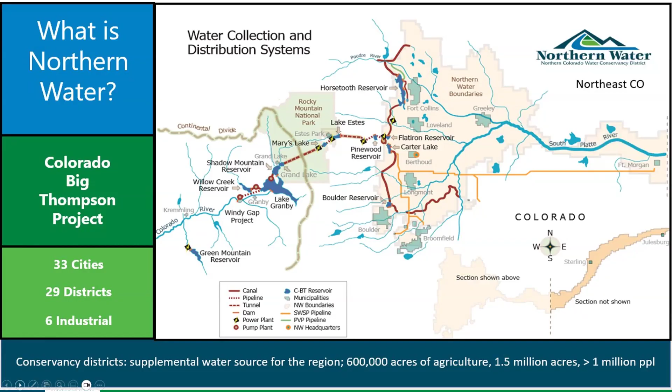So we do have an efficiency program here at Northern Water. That's where Lindsay and myself spend most of our time. Lindsay Nerad here is on the call as well. She'll be hopping into the SLT conversation here in a bit.

At the top left, you can see we do have a conservation garden on campus in Berthoud. If you ever want to come visit, you can come visit it during normal business hours and on the weekends. We're usually there during the week as well. If you ever want a free tour, we're happy to walk you around, show you all the cool plants.

It's just a lot of low water alternatives to bluegrass and other really thirsty plant material. So we like to show off a lot of native stuff, warm season grasses, native grasses, good trees, perennials, and plants and such. So if you ever want to come check it out, let us know. We'd love to show you around.

We also host a series of consultation and audit programs. We have 2 outdoor audit programs, one of which is with Resource Central. They support our commercial outdoor audit for a lot of our HOAs and businesses that request these services, whenever we just need a really comprehensive overview of what the irrigation scheduling might look like and what their general water use is.

This is where we like to partner with Resource Central and get those services out there. We do have an advanced audit program when we get into some bigger systems where maybe it's a lot of acreage or we have pumps and ponds, reclaimed water source. It gets a little bit messy, so we like to bring in an engineer and they'll do an advanced audit.

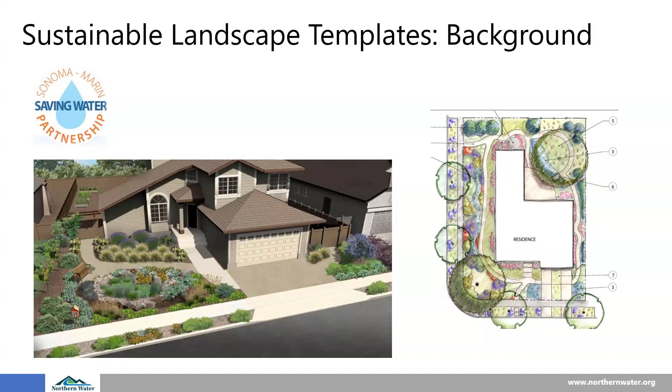And so we had a stakeholder group that we also like to call an advisory group, because they really are sort of the brains behind this endeavor and really helped guide the process.

City and County of Boulder, we had the Boulder Fire Rescue, Wildfire Partners, and a Commercial Horticultural Specialist that was actually also with the CSU Extension. And then a nonprofit, the Boulder Watershed Collective, also took part in the stakeholder process.

So to give you a rough timeline on how that happened: in January, we held our first initial meeting, this was January of 2022, with our advisory group. There were initially a few more folks involved than the list I just mentioned, but it was a long process, and not everybody was able to stay with us through that whole process.

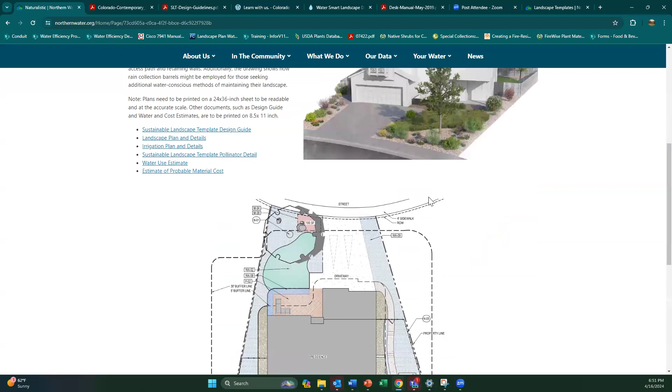And then the Naturalistic - we can just open that one real quick. You can see here what the features are: it's a pie-shaped lot with a walkout basement and 14,000 square feet. This gives you that 3D of what, if everything goes right, it will look like in your landscape.

And this is kind of an overview of the landscape plan, so we have our lawn and water needs laid out here. We'll go back - we also have a large lot, which was something requested by the stakeholder group, for the needs of the unincorporated Boulder County area.

We can take a quick look at that - you can see this is over 45,000 square feet, so a much larger lot. And this is the last one I'll show.

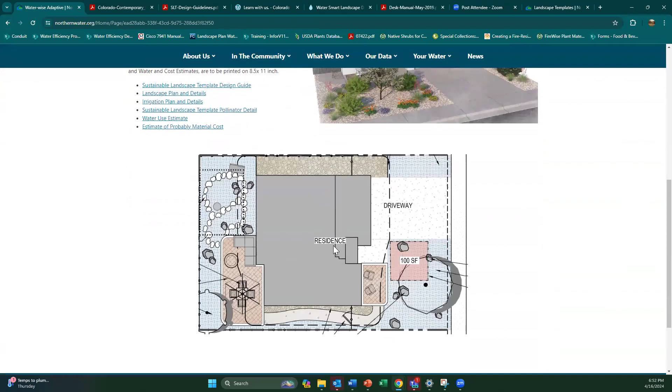This is the Waterwise Adaptive, modeled after the Sagamore neighborhood. Much smaller than the other ones, just 3,000 square feet. We don't even - in this option, and there's actually another option that doesn't include any turf in the plan.

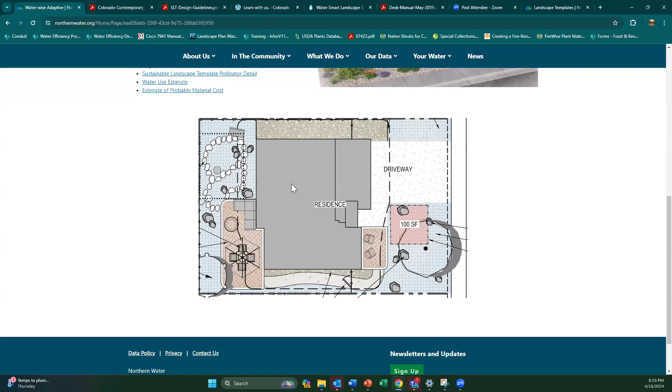But of course, all of these are just suggestions - for you to change and adapt and make your own. You could make the patio smaller and put lawn in there, or however you wanted to change that.

So go back here and I'll go through this Colorado Contemporary. They all come with the same tools, the same list of resources, so we won't miss out on anything by just using this plan. I'll start with the design guide.

So obviously we have a table of contents there, a little bit about the project background. I want to point out that this talks about flex space - each design has what we call flex space.

These are spaces that are, as they sound, flexible. You could use these for a kids' play area, a fenced dog run, an alternative outdoor storage location, a vegetable garden, or a pollinator garden. We do have a pollinator detail included in the resources, which we'll talk about later.

In this section, every plan specifies a type of grass, but again, just a suggestion. Maybe the plan that works best for your site identifies buffalo blue grama mix as the lawn type, but if you have kids and a dog, that's probably not going to work, so you might want to pick something else.

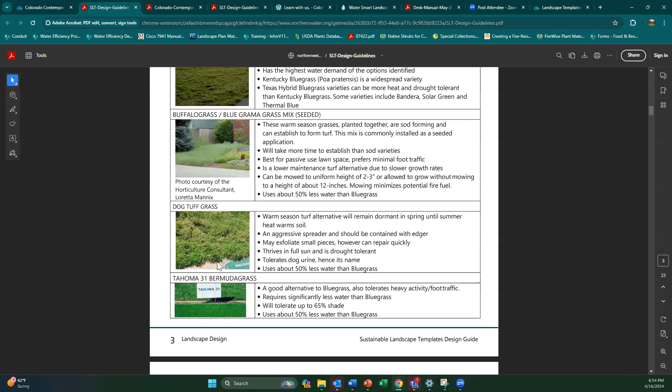You might want to pick the dog tuff grass. This will give you the key characteristics of each sod type or seed mix, whichever the turf requires. So these are kind of pros and cons of each type of turf here.

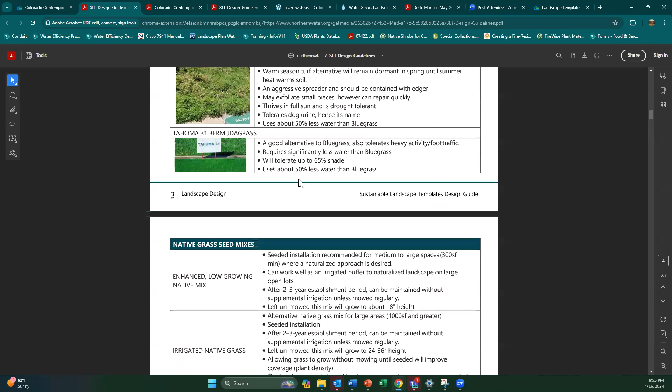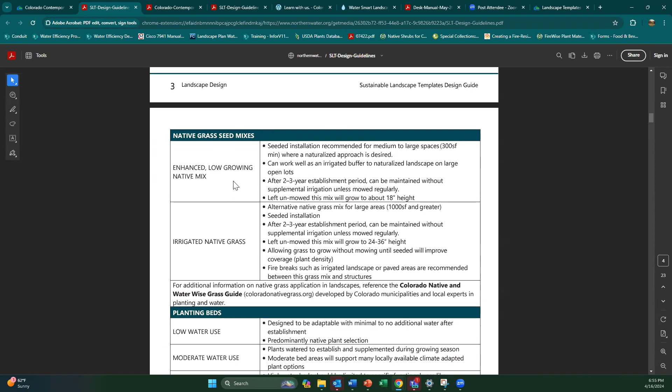And then this one's just primarily for the large lot, the native grass seed mixes. That's more designed for the large area. We'll look at that a little bit more later.

And then planting beds, primarily we're going to use those low water use planting beds. This is just some points on how you're going to establish those plants, the water use that you'll need. We don't really have any high water use areas. Those are really just going to be your vegetable gardens or your annual beds, so we don't have anything specified for that. We definitely are trying to move away from high water use areas, as you can imagine.

As you can see, this is irrigation, so I will leave that up to Spencer. He's our irrigation guy, he'll be talking to you about that.

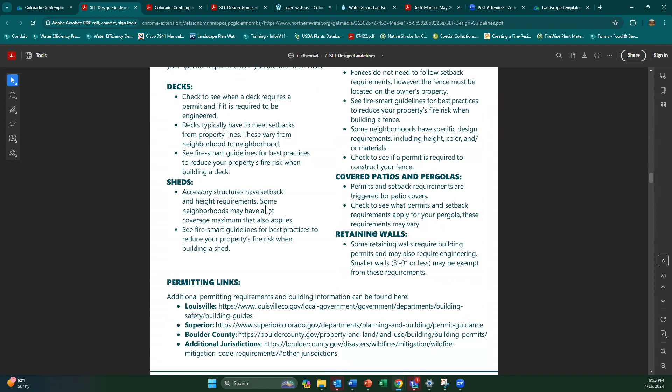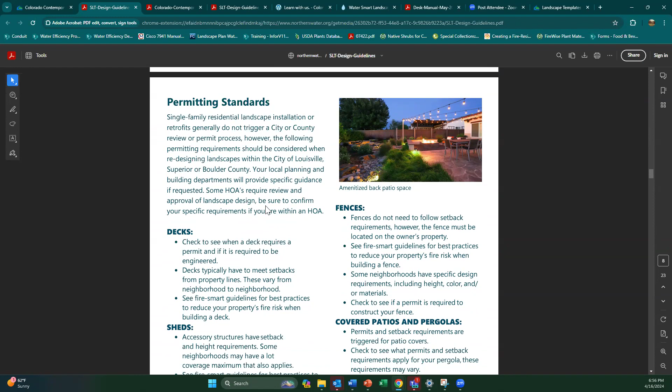And so permitting, we found is just kind of a moving target, and so we didn't really want to lay out too much in terms of permitting. We wanted to just give you some basic tips and provide the websites you need to look up those permitting standards. So if you're looking at any of these things, decks, fences, pergolas, retaining walls, definitely check in with your local municipality to see what sort of permits you might need.

This was obviously a big one for the templates, the Fire Smart standards. First, very important, we have our zones. Zone 1, you don't want to have anything in that first 5 feet from your house. We're really just looking at rock, fences that are metal. Really staying away from any plant material in that zone.

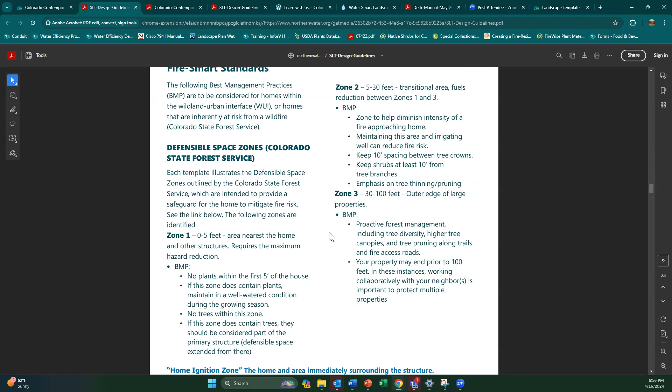And then in the second zone, we're really paying attention to where our trees are. Our trees, the mature canopy, need to be 10 feet apart, in addition to 10 feet away from the roof. And we don't want any shrubs under trees, we don't want anything woody. We're really just looking at ground covers.

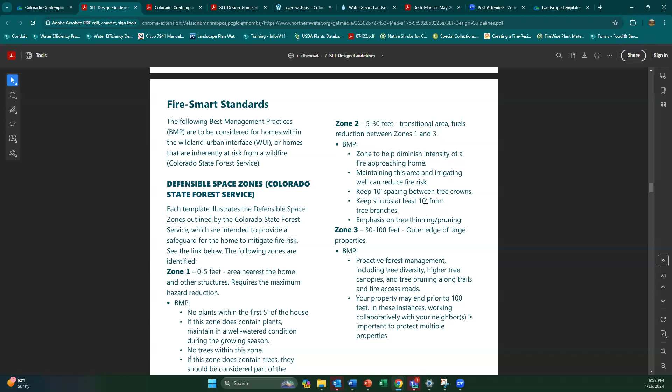And then just some other things to note. You probably won't want to use any rock mulches—sorry, you won't want to use any wood mulches. You're definitely going to want to use rock mulch, pea gravel, and those sorts of things that aren't flammable. So if you're really attached to your wood mulch, just make sure you're surrounding it with some type of hardscape, so it's like an island of mulch surrounded by other non-flammable things. But we use a lot of the squeegee at the garden, and we've been finding a lot of benefits from that, so we usually recommend squeegee as a mulch.

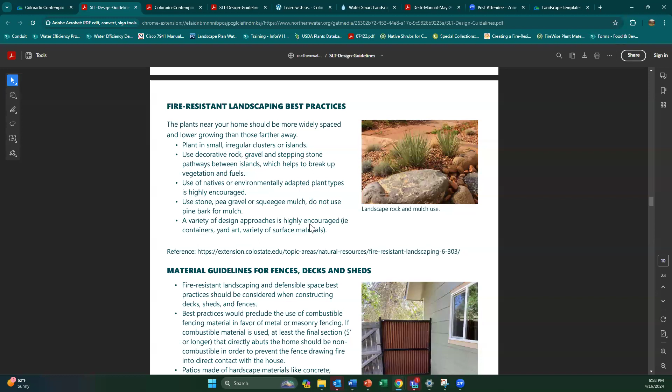And that's what all of the plans require or suggest, I guess. So this you'll see here is the fence, attached to the house, the 5 feet of non-flammable. So it's not wood here, that's metal, corrugated metal. And I know that's not the prettiest, there's definitely some different things you can do. That's just to give you an idea of what that would look like.

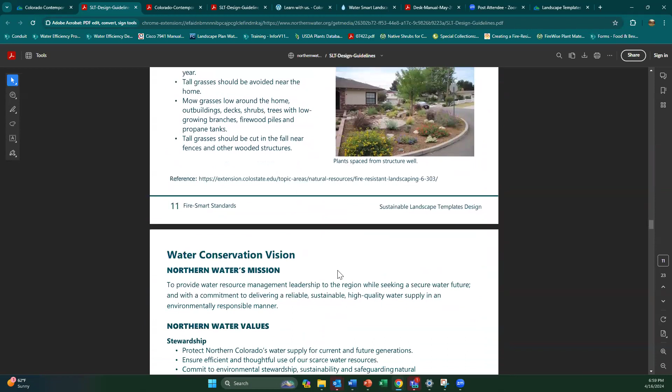I don't want to get too much into every detail here because you can definitely look over this on your own time. I mostly just want to outline the things that I think are important.

Moving down here, another thing to note, we by and large definitely recommend that folks go ahead and get their soil tested, particularly if you're in a burn area. You might have contamination in the soil, and it might really be necessary to amend that soil or bring in off-site soil. However, typically we don't recommend tilling or adding a lot of organic compost unless it's for your vegetable gardens or annual beds or things like that. Our native and low water plants don't really need those types of amendments, they do perfectly fine in our native soils.

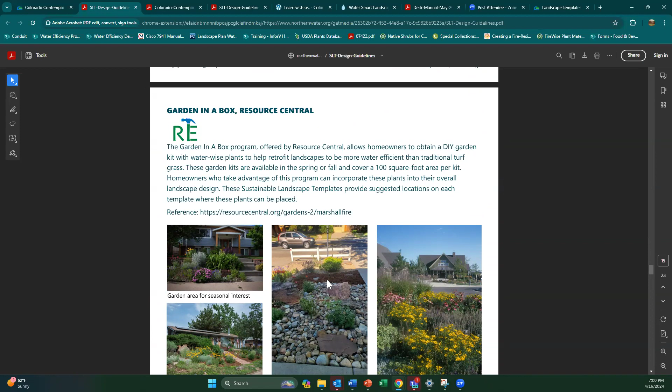So we'll move down here. You guys know all about Garden in a Box, I'm assuming, since you're here. But the folks that were affected by the Marshall Fire were eligible for, I believe, 2 of the Garden in a Box for their yard.

Okay, just a note, it's important that if you are wanting to print out any of these plans, that you print this section out on 24 by 36 sheets. That will ensure that you're able to read them and that they are to scale. Each one here, as you can see as it slowly loads, has a scale, so it's important if you want it to scale that you print it on a 24 by 36 sheet.

So we'll start up here, general landscape notes. These by and large are notes that you will want your contractor to follow. It's probably a good idea for you to read them as well, just so that you're making sure your contractor is doing the right thing.

I do want to point out that the first one here says you have the option to downsize plant material. I would actually recommend this. I think by and large the plans call for 1 gallon pots, but I think 4-inch pots are perfectly fine. What we find is that with smaller plant sizes, they tend to establish more quickly.

So when a plant is in a gallon pot, it's lived so much of its life in that container, and it's going to take a little bit longer for those roots to establish in the ground when you plant them. Of course, they're a little cheaper too, so that's a double benefit for you.

Moving over to the landscape legend, this is something you'll definitely want to take note of. It has this code here, and you'll see these on the plans, codes that call out to what type of turf, edging, and the different characteristics of the plans.

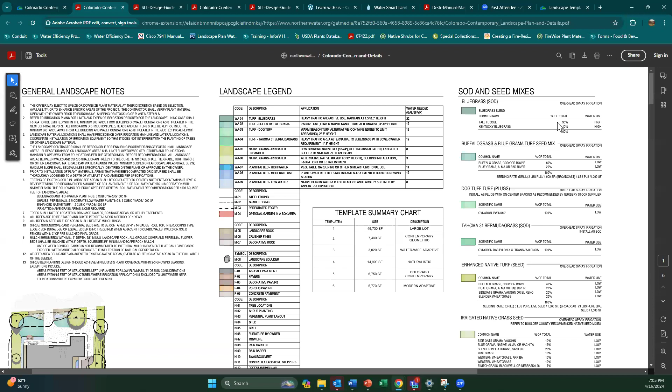This becomes more important with our seed mixes. If you wanted to do the Buffalo Blue Grama blend, this is what you're looking at, an 80-20% blend. For that large lot, this is where we get into these seed mixes too, so that's something to pay attention to if you're working on a large lot.

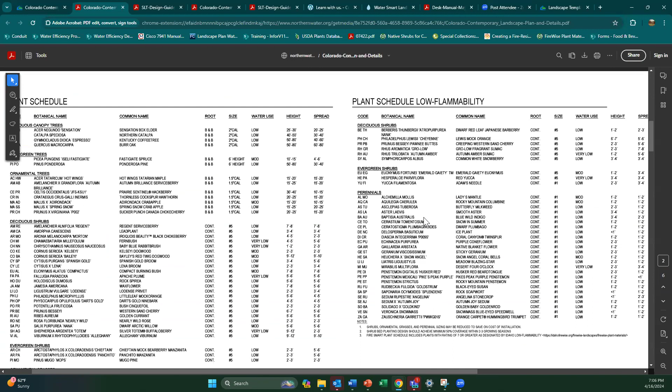This is kind of a plant schedule that's a little bit more for the contractor. They don't necessarily need all the pretty pictures, but something to note would potentially be this low flammability list. If you really wanted to work on the low flammability side, this might be the list you want to draw from.

So here is our landscape plan. This is kind of a general layout, not a lot of specifics, but you'll see we have little codes here that tell you what everything is, and you can also see it by how it's colored.

So we have a little high water area over here, and I think that's called out as a vegetable garden. The kind of reddish areas here are the areas designated as the garden in a box area. If you are getting those garden in a box kits, you're able to have those outlined here. Obviously a suggestion, but easy just to pop them in there.

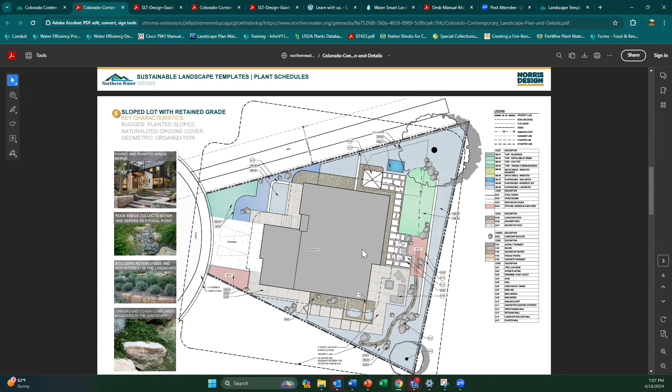Moving on to the actual planting plan, this is where all of your plants are laid out. I did want to point out that this plan specifically does have retaining walls.

You might notice that these thin lines here are retaining walls to retain the grade, which was requested of us by the advisory group. As you can see, if you don't have the garden in a box that you're going to be utilizing, there are plants laid out here, so you don't necessarily have to come up with that on your own.

You'll notice that each plant has this little code, and this code is based on the botanical name. If you come over to the left-hand corner, all of the different codes are laid out alphabetically with the common name next to it. So it may not seem to make sense when you see something like AMCA and then it's lead plant - what does AMCA mean? Well, that's based on the botanical name.

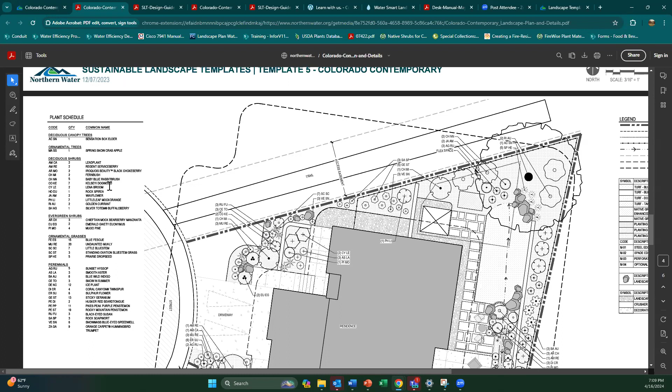So you'll have to look at what it is and come over here to check, and then you might want to look at the plant list with the photos and see if you can find a photo of it there to see if you like it.

Obviously these plans aren't going to be applicable to every site. Your neighbor might have a huge tree, and there might be full sun plants in here that won't do well under your neighbor's tree. So you might have to look at that plant list and switch some of these out with something that will do better in the shade.

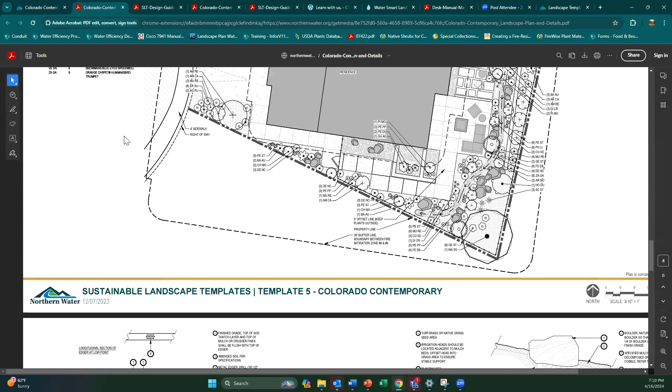Oh, and here's the scale - I just wanted to point that out. In the lower right-hand corner is the scale, and as you can see, 3/16 of an inch equals 1 foot on this plan. So when you print this out at that 24 by 36 sheet, which will probably have to go to Office Depot or someplace like that, then when you get your ruler out - you can get special rulers, but you can also just use your ruler from home - 3/16 of an inch will equal 1 foot on the plan.

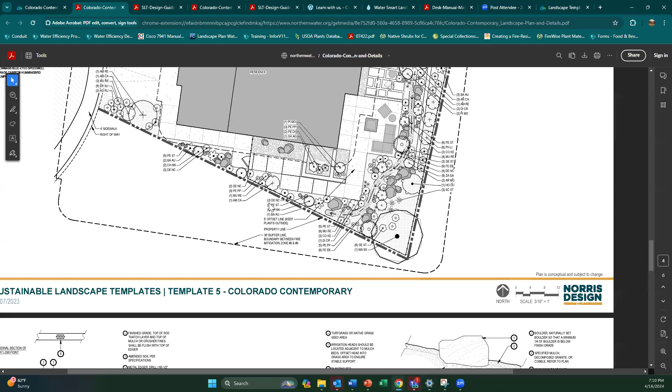So lastly, let's talk a little bit about the details. Some of these are used on the plans and some aren't - some are just extras that we thought might be handy. An example is the rain garden. We don't have any specific rain gardens called out - I know people were very interested in that, but Norris felt a little uncomfortable with a rain garden because of our clay soils expanding and potentially affecting foundations. So we have to be very careful about where we place those. But we did include a detail on that, as well as a detail on rain barrels, which is something else we didn't necessarily specify in the plans.

Something that is in the plans is what they call a cobble swale here, similarly could be called a dry creek bed. So you just have some specifications on those. Again, I think this is going to be a little bit more on the contractor side, but definitely welcome any questions from folks wanting to tackle this on their own.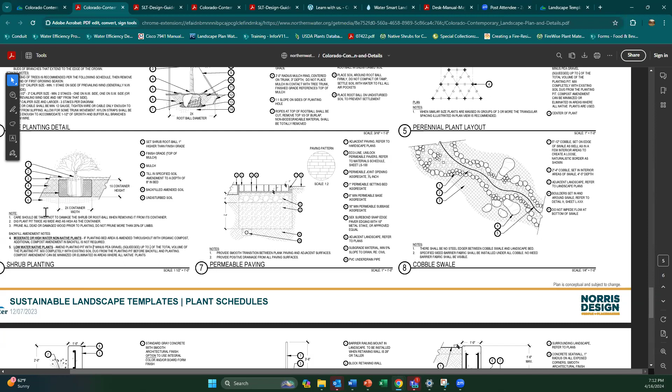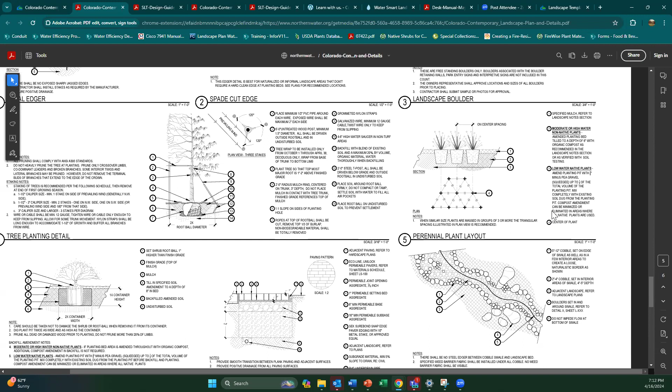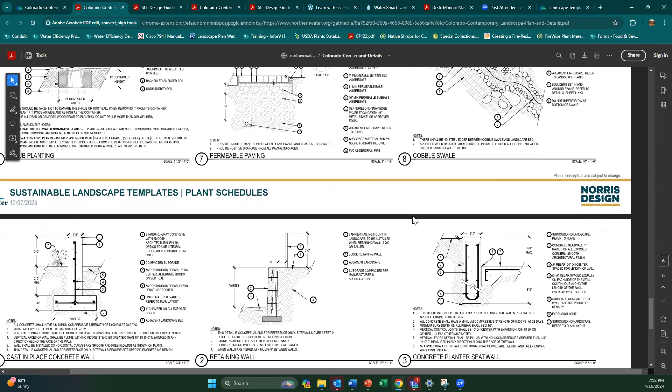Just a note here that planting in this triangle shape tends to give the best design effect, I suppose. We do have a note here about the low water plants being amended with squeegee in the planting hole, and either eliminating or minimizing that compost amendment. They tend to get big and overgrown fast, and sometimes die a little bit before their time if they're given too much compost.

So I think that does it. We do have the retaining wall details here. Obviously everybody's grade is going to be a little bit different, so there are some measurements given, but you're probably going to need to work with a contractor to decide exactly how high your wall needs to be, how far down your footer needs to go, and all that stuff.

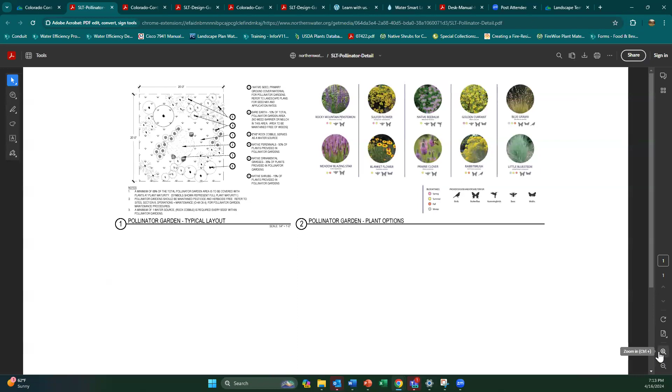So let's see here, we'll go back, and then quickly I'll hit on the pollinator detail. This is really just a rough detail - these plants specified here are all native to Colorado, great for pollinators. You can see it has a little key here of when it blooms and what it might attract - very nice, in my experience, easy to grow plants suggested here.

And then just some notes - I would probably say, it says to use a seeded ground cover. I think buffalo grass, maybe mixed with some wild blue flax, might be a good seed mix for a ground cover. But then the rest of these, we're really using plants that we're buying as 4-inch pots, so we're not waiting for all of that seed to establish.

One note here that I was noticing as I went through this - it says 6-inch by 6-inch rock cobble serves as water source. I feel like that is a little bit under-detailed. I think what they mean is maybe you put it in a saucer with some cobble in there, and then you can put water in there - that's really beneficial. So providing some sort of water source, I think, is basically what we're getting at. That's really important for pollinator habitat, if that's what we're trying to do.

This area in the middle is a bare ground area, and I think this is really just some loose guidelines to get you started. Your bare ground area probably doesn't need to be in the middle - it can be wherever, but the idea is that our native bees primarily nest in the ground, so we want to leave some of that space open for them so they're able to build their little burrows and do their thing.

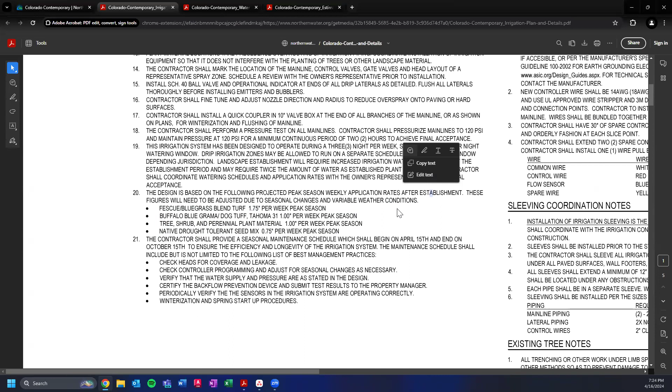So, almost having your water use already optimized for a warm season grass that can handle dog urine, that's pretty cool stuff. On top of this, we typically love to ask the contractor to provide a seasonal maintenance schedule.

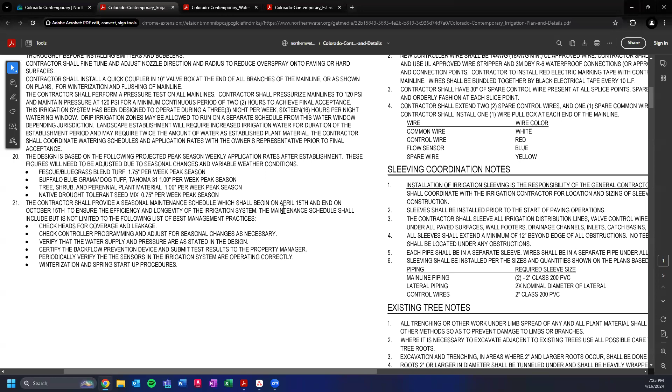This is super valuable as a homeowner, especially if you like to do all your own maintenance. It's just something you can check off throughout the year. Like, okay, it's time to start thinking about turning your sprinklers on and getting your schedule going. There's usually a couple mid-season checkups on what your schedule is doing, and then thinking about winterization and blowout in the fall towards winter.

Something else that came out of this project was the maintenance manual, which Lindsay will talk about in a few minutes. That's a really cool product we're working on. It's all encompassing of the entire landscape, so not just irrigation, but it'll talk about everything else going on outside.

This section right here is what your plumber and your electrician are going to want to read. It's basically coordinating where's my water coming from, how much water do I have, how much pressure do I have, and how big is that pipe and what material is that pipe?

That's all stuff you can give to your plumber, and he'll be like, okay cool, I know exactly where to go, I know exactly what kind of backflow preventer to install off of exactly what kind of pipe, and I know what kind of pressure we're looking for. If you can get all those things coordinated, it really makes things a lot easier.

And if there's anything you do not want to DIY on this project, it is your point of connection. Everything else you can probably stumble through if you have to, but this is the one thing I would not mess around with.

Down here we also talk about our controller location. Once we get to the layout plans, we'll talk a little bit about where we like to put the clocks. Typically these are located inside in the garage. The reason we do this is it's accessible from a contractor's perspective, so if you have a maintenance guy over, you can just open the garage door. He doesn't have to come in and out of your house to do it.

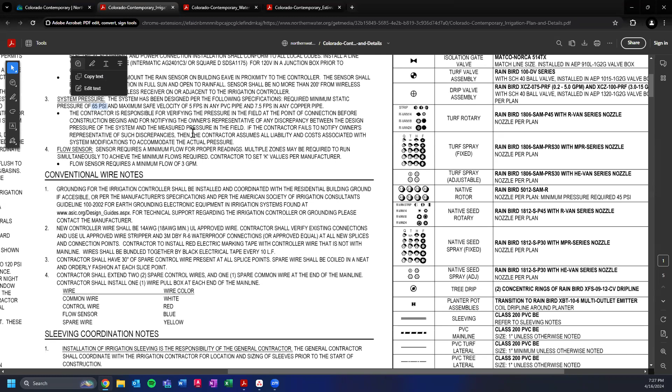A couple other things, like the rain-freeze sensor - if you have a ladder and a screwdriver, you can hang that thing up. And then talking about minimum pressure requirements, most of these systems are going to need a minimum 65 PSI. That's usually not a problem in our neck of the woods, but it's always worth checking before you get started.

And then the flow sensor - we're going to get into this in a little bit - but there is a minimum required flow for that to operate. All of that stuff is considered in the designs, and it's just something else for a contractor to check off and make sure that's operating properly.

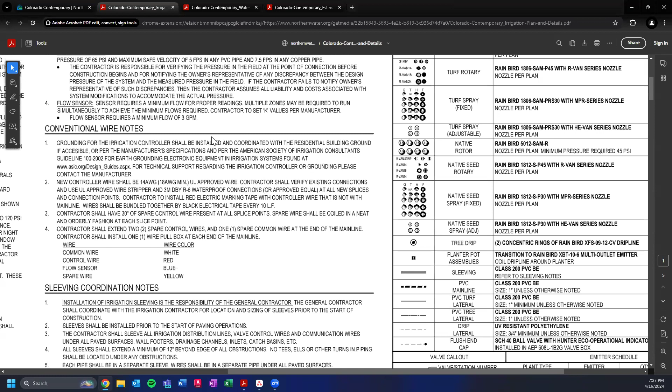As many of you know, with your sprinkler systems there's lots of wires in the ground, and this is talking about how to protect your system in case of electrical surges. It's basically the same thing as plugging in a surge protecting strip for your TV and your speaker, right?

There are grounding requirements for controllers, and this is talking about how to do that. There's a great resource, the American Society of Irrigation Consultants, right here. If you really want to get into the weeds, that's a really good resource. Otherwise, just ask your contractor - most of the time, if it's a wall outlet, you're going to be in good shape.

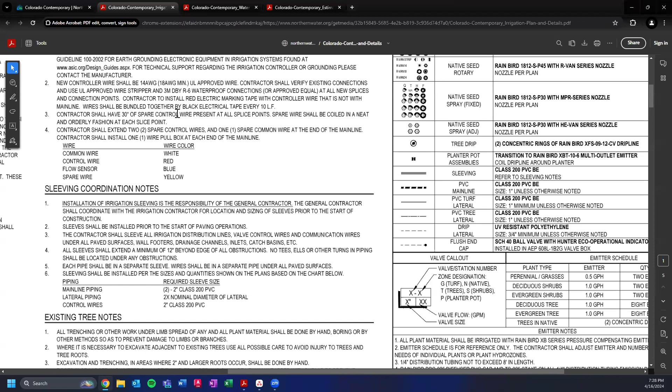There are some wire sizing requirements that we like to follow. Traditionally, older residential sprinkler systems have undersized wires. So using a little bit bigger wire helps maintain the longevity of those valves and opens them up a little bit quicker. So we like to spec a little bit bigger wires - they're not that much more expensive, and it's totally worth avoiding the pain down the road.

We love to call out the different colors of the wires too. This is also really important if you're installing a new system, since different wires have different purposes. By coloring them, you can help identify what purpose each wire serves.

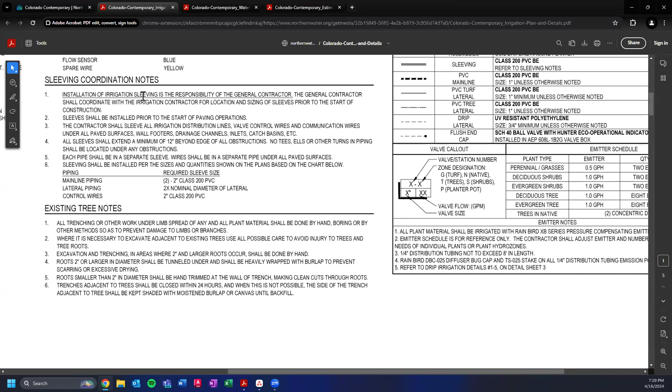Otherwise, you might have to do some electrical testing to determine that down the road. Sleeves are also pretty cheap if you're doing a new build, and super valuable. This is basically a larger pipe carrying a smaller pressurized pipe under a paved surface. The reason we install these is if that pipe under, say, your driveway fails, the sleeve offers a passage for that pipe to be removed without having to dig up your driveway. I've seen it happen - it's not fun, and it's pretty expensive.

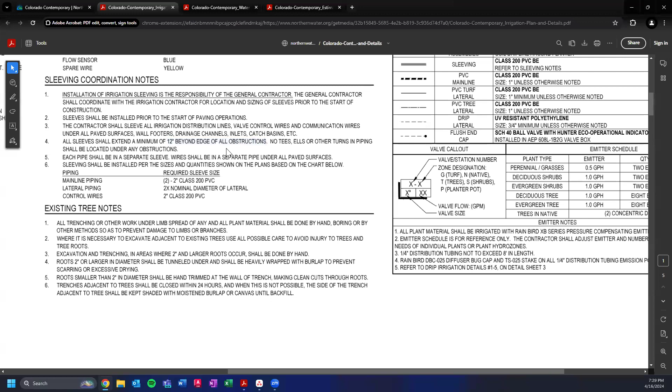This talks about the materials of the sleeves and how you want to install them. They like to extend them 12 inches beyond the paving surface, just so they're easier to find. Then this talks about what kind of PVC, and how to size them. Typically we like to do twice the diameter of the pipe passing through, which tends to give plenty of wiggle room.

Here we have existing tree notes. This is also really important if maybe you're only doing part of your yard, and you've got a big elm in the backyard and you're worried about hurting the roots. This is going to be your resource for determining - if the roots are larger than 2 inches, you need to protect them this way. It talks about different excavation methods for working around them and protecting the health of the tree while still getting your irrigation situated.

On the far right, this is our schedule. This tells you the products we recommend be used for a residential system in Colorado. I've done a lot of residential maintenance myself, and I stand behind all of these products - all of them that are applicable are WaterSense certified by the EPA. These are promoted products as well.

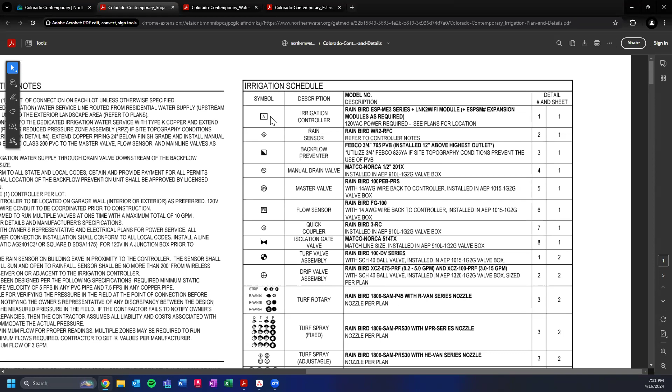As you can see in the schedule, we have our symbol here, and with that symbol we have an associated description and the actual model number on the right. So working from left to right, you've got symbol, description, product. We will see these symbols down in the layout in just a second - actually, I'm going to scoot up there now because we have the legend on the same sheet.

So what we can do is look at this legend. For example, this is a really good zone right here, A3. We can say, I don't know what this thing is right there, so I'm going to go down here and look and say, okay, that's my turf valve assembly. That's what's going to let water into my zone and let my sprinklers pop up. So that tells me I need to go to Rain Bird, buy a 100 DV, and it's going to be 1 inch, which we can see up here.

And then I'm going to move forward to my next line. Now I've got this black line right here, and I'm not sure what this means, so I go down here - this is my PVC turf lateral. This is going to be class 200 PVC, and it's going to be 1 inch unless it's noted otherwise. In this case, it's noted as 1 inch, so we know to go buy 1 inch PVC.

From here, all of this piping is schematic. So if you see bends and angles and stuff, it's just how it's drawn - it's not necessarily how it has to be installed. The order in which the heads are installed, the actual overall routing of the pipe, the way the heads are connected - that should stay the same.

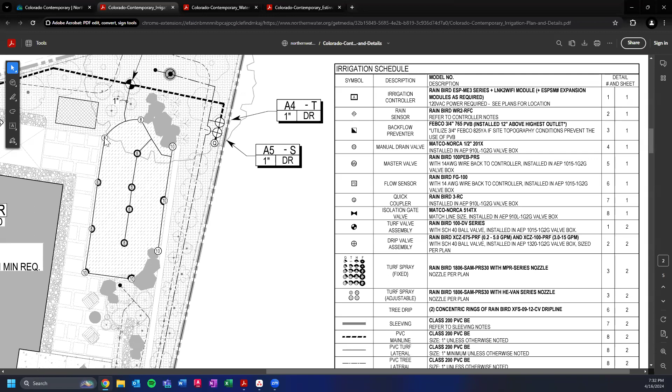As we move forward here, now we see this 8 with a circle, and this is another - who knows what that is - so we'll go back to our legend. If we get in right here, we can see it. I'm not sure if you guys can see this or not, but we'll see this number 8, and we know that is a fixed turf spray.

So the turf sprays, those are your standard fan pop-up nozzles. They're very, very common in Colorado homes. So that tells me this is a spray zone with all the fixed spray nozzles. This is the body of the sprinkler I need to buy, and then this is the nozzle series I need to get as well.

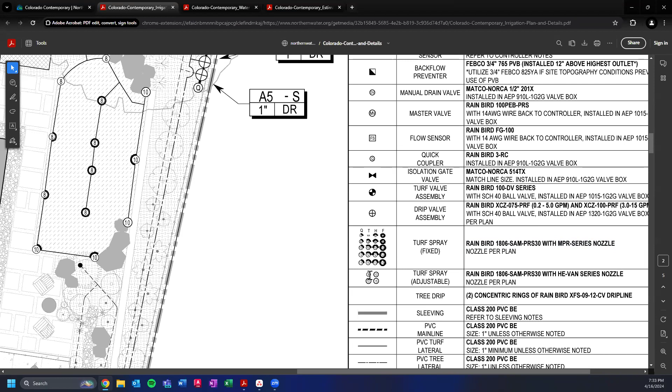This number associated right here, that's your nozzle number. So the 8 is telling me this is an 8-foot throw, meaning it's going to throw 8 foot in radius from head to head. We've got a couple different nozzle sizes here - we got some 10s, we got a couple 8s.

The darker ring will show basically the direction of the throw. So these are going to throw 360 degrees, and these are going to throw 180 degrees. Things like that are going to help you read these plans.

There's a bunch of other products on here that are pretty important. We talked about the backflow preventer - again, just let a professional do it. It's not worth trying to do yourself unless you're a licensed plumber.

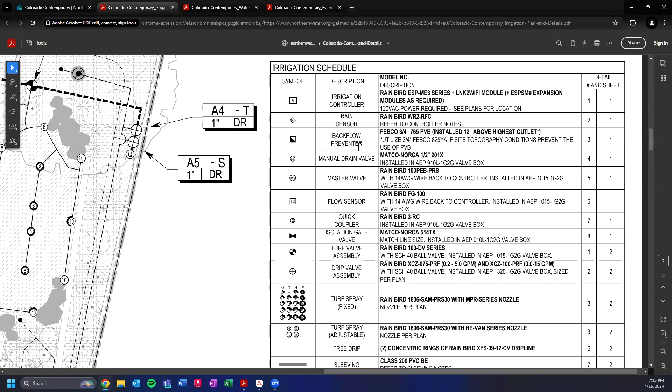A couple of the other things I'd like to bring up: we have a master valve and a flow sensor called out on these plans. These are two really cool products that talk to each other and are a really, really big opportunity for water savings, especially if you're on a bigger lot. On smaller lots, they're a little less relevant, but they still play a nice role. On these bigger lots, the way this works, this flow sensor is basically a water meter.

What it does is it records the flow, any active flow. So if you've got a sprinkler zone running, say it's running 5 gallons a minute, this thing's going to be telling your controller, hey, we've got water going right now, we've got 5 gallons a minute running. And the master valve is going to say, okay, this is expected flow, I'm scheduled to run, I'm going to stay open and let the water pass through.

Now, all of a sudden, maybe your husband's digging in the yard and he breaks a line and now there's water everywhere. Now you're running 20 gallons a minute, and that's a lot of water. This flow sensor is going to tell the clock, hey, something's wrong, we're using 4 times the water we should be using. The clock's going to be like, okay, noted. It's going to call the master valve, and the master valve's going to shut down. So basically any unexpected high flows, the master valve will be able to shut that down.

The flow sensor isn't only really good for what I just described, but it's also really good for just recording your water usage for your irrigation. I know a lot of you will just look at your water bills and compare it to your usage in the winter, but this will give you a perfectly identified difference in your outdoor versus your indoor water use.

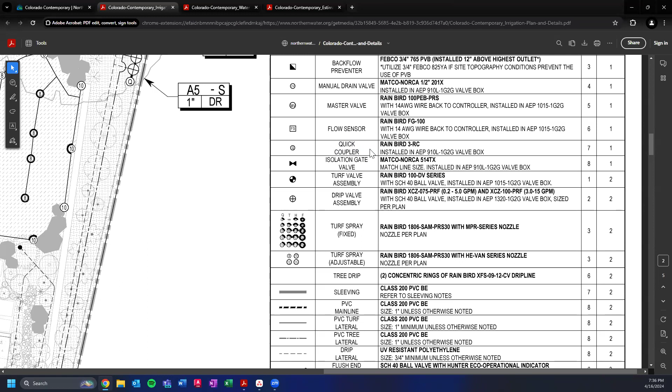On smaller systems, this is actually an opportunity to save a little bit of cost. You don't necessarily need them if your hose from your house can reach everywhere in your yard - you don't really need one of these. We do call for isolation gate valves as well.

This is basically a way to shut down sections of your system. So if you have a larger system, say you've got a big line right here, and then it does a T, and you've got sprinklers over here and some over here, you can isolate a leg like so, in case, say, this head is leaking. You can isolate that leg, and while you're fixing that, you can still irrigate here on the right.

So this is especially good for larger zones or larger systems where you can't necessarily afford the downtime. Maybe you're establishing some new plants on one side of the yard, and on the other yard you have to make a repair. So this adds a little bit of flexibility when it comes to maintenance. I personally put them on all of my systems. Smaller systems might not be necessary, but if you have a larger lot, I highly recommend them.

The turf valve assembly and the drip valve assembly, this is just what allows water into your sprinklers, really. This is the last line of defense before it starts coming out of your heads. These are the products we have to use. Again, we're going with the Rain Bird valves. They're tested, tried and true, and the service is very easy on them. They're very operator friendly, and they can handle low flows. So we really like to use those a lot.

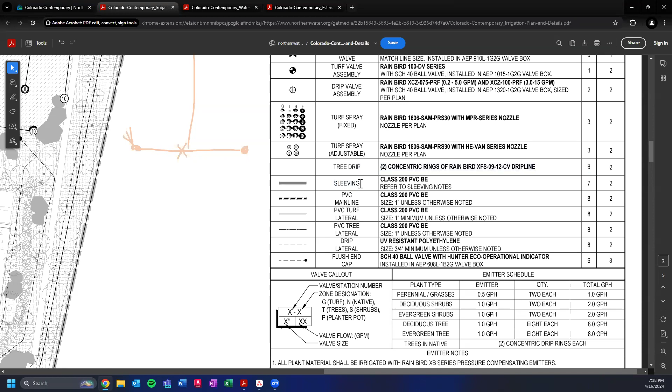This is another place where we can see some of the piping material. So kind of going back to the sleeving, which we talked about, your PVC mainline and your laterals. When it comes to residential stuff, it's almost always class 200. This is very standard stuff. You can get this at Home Depot, and it's very easy to assemble. You watch a quick YouTube video on how to solvent weld and you're there.

The only different pipe here is what we call UV resistant polyethylene tubing, and many of you would actually recognize this pipe. It's about 3/4 inch in diameter, it's black, and it's a little flexible, kind of like a hose almost. The reason we use this is we can directly install emitters into the wall of this pipe. So that's why we use that, but we're going to be using PVC for just about everything else.

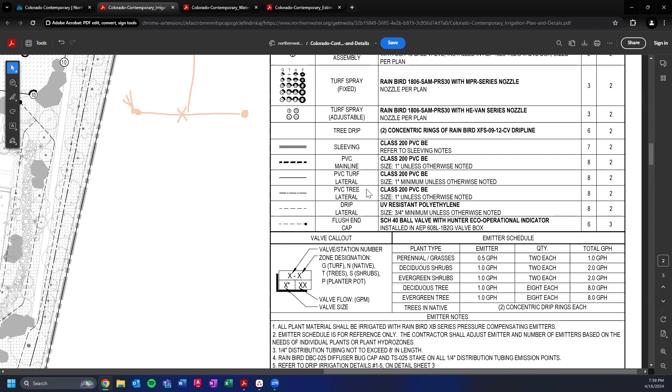Down here, we have our valve call out. So this kind of shows us, let me scoot over so we can get an example here. This will show us, gotta find one.

So when we look at this, we see letters and numbers that might not make any sense. A5, this is going to tell me that we are on controller A. For some of you with larger lots, you might have 2 controllers, but for the most part, most people are going to have 1. So we're going to call the first controller A. We're on zone 5, so this valve right here, this drip valve, feeds zone 5 as it's programmed into the controller, and it's going to be irrigating shrubs. So the S is for shrubs. The T is for turf or trees, depending on your designer. There's a couple other acronyms depending on who you're working with.

And then this right here is going to tell you the size of the valve. So for bigger zones, we're going to need bigger valves. For the most part, if we're staying within 15 to 20 gallons a minute, which most of you will be at a residential level, a 1 inch is going to be sufficient. And then this is actually going to talk about the style of irrigation. So this is saying this is drip, and that's what that DR means.

A couple other notes with emitters, I'll go to this detail here in a second, but this is just telling us, a lot of people have drip installed but don't know how many emitters to put on their tree. And then you've got a shrub or whatever it might be on the same zone, and it doesn't need the same amount of water. How do I know how many emitters to install on all these plants? This is a good starting point to tell you how to install these emitters, what quantity you need, and what volume each emitter needs to emit in order for successful plant material.

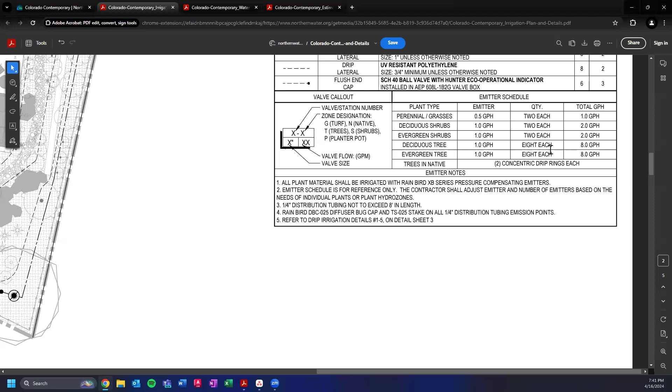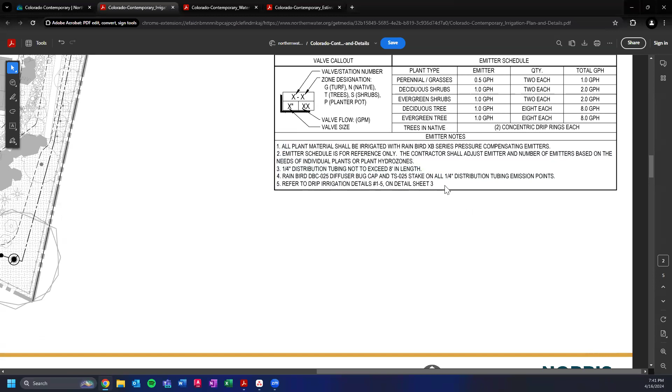So we'll talk a little bit about this in detail. There are notes here referring to that detail on how to install it, how to make sure you don't have super long runs of that black spaghetti pipe running around everywhere, and make sure that zone is still successful.

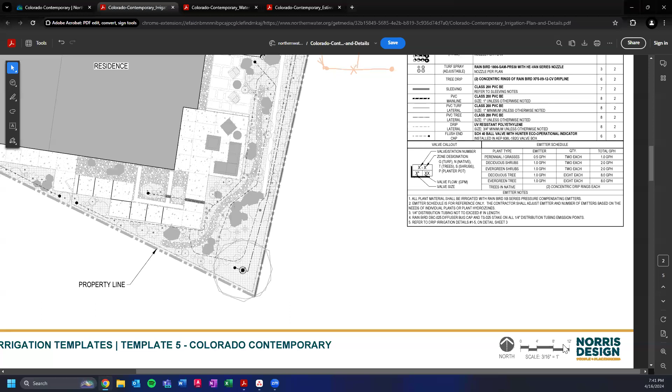As Lindsay's talking about her plans, these plans are also scaled. So if you wanted to print a construction set for a contractor, it would need to be printed on a 24 by 36, and they would be able to work with that. The PDFs are also scaled, so if you just wanted to email them, you could do that as well.

Moving on, we have our details. If you are a DIYer, this is going to show you how to actually do everything. I'll take a sprinkler head as an example. If you're wondering, I know what sprinklers look like when they're running and installed on the ground, but I don't know what it takes to actually put one in the ground, dig it up, buy the fittings, or which fittings I need, this is your resource to do that.

For every piece of equipment that's been identified on these plans, there is a detail associated with it as well, and that's going to be at the end of the irrigation plans. It'll tell you everything that you need.

So looking at a spray head, I see this right here. This is obviously my spray body in the middle, and we have our finish grade, and a little bit of grass. Maybe we have a curb, maybe we have a driveway.

We recommend that heads get installed about 4 to 6 inches off of the curb, especially in turf areas. The reason is that when people run edgers, they will chew these heads up, and I've seen it happen a hundred times. So we really recommend keeping them a little bit off. This grass is not going to die -- that 6 inches of grass is not going to die. It's never been a concern, I wouldn't worry about it. I personally spec about 4 inches, but I've seen them at 6 and they've been very successful.

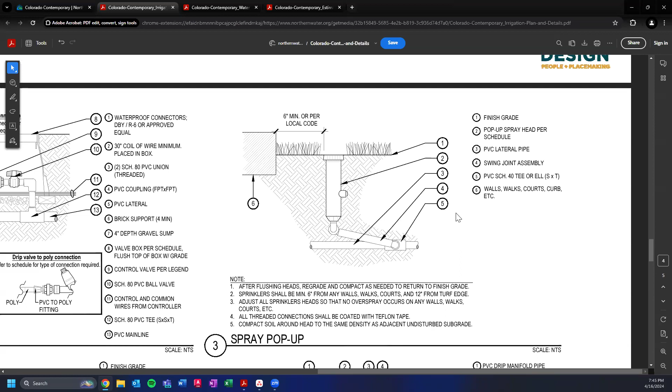As for the rest of the details, some of them get a little more complex when you get into the valves and the wiring, but I promise you, if you do your reading and watch some YouTube, you can do it.

It's not rocket science. So we got a couple other details here. This talks about pipe sleeving, as we did earlier. There's notes on it, and there's also this wonderful diagram.

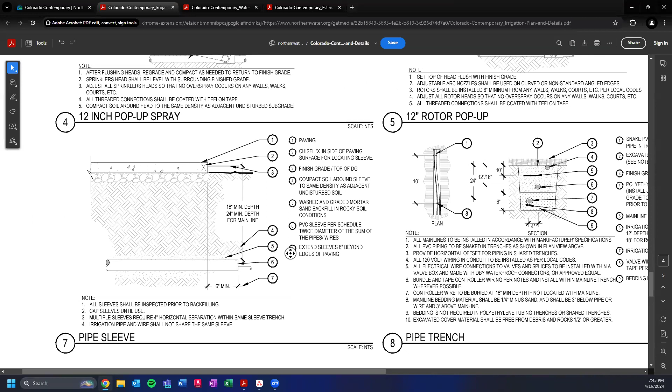It talks about the depth. We talked about that 6-inch buffer off of the curb. This is also a really good detail that tells you how deep to bury all of your lines - your main line, your laterals, your drip, your wires. You know, how does all that work? This is going to be your opportunity to see where everything goes.

And then some pipe snaking as well. A lot of the pipe will expand and contract in the ground, so snaking it in your trench gives you a little bit of opportunity to avoid failure and build in some flexibility. It's like installing vinyl flooring - if you don't give the gap, it'll buckle and fold up in the middle. This will do the same thing.

And then here, these are a lot of our drip details, and this is the good stuff. Even if you're just doing stuff at your house and extending a drip line, this is a really good resource where you can figure out how much water you need to give your new plants.

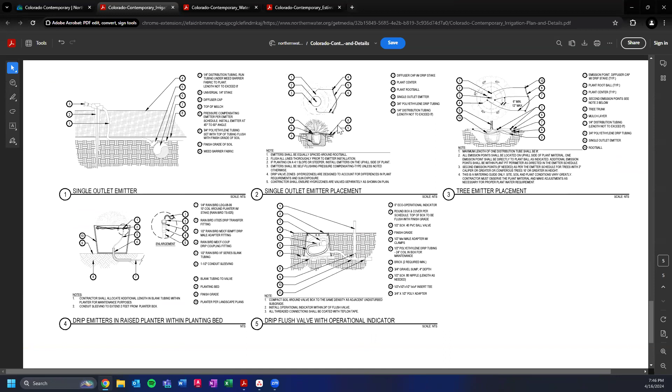So we had the emitter notes back in the legend - I'm going to go back up to those real quick. Right in here, this will tell you exactly how many emitters to install for what kind of plant, and the volume that those emitters need to be.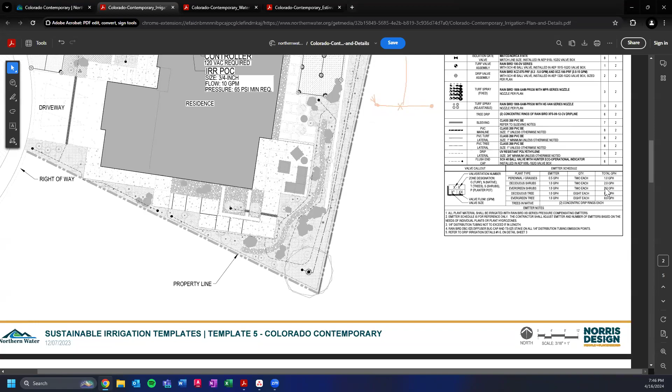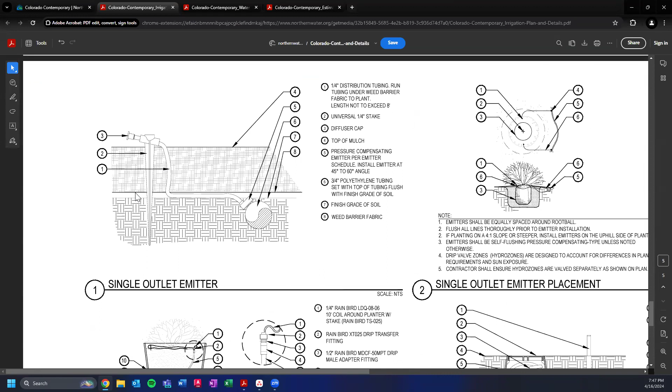When we go down here, this tells us how to install those emitters. So when we have a single outlet, this yin-yang right here, that's our lateral line. We'll literally just stab the emitter into the side of it, run a black piece of spaghetti - that 1/4 inch drip tubing, really small - and then you can stick it up on a stake and the outlet will just sit right above the ground. If that's not your speed, you can stick these underground too, if you want to hide everything. This is going to talk about the placement of that.

You never want to stick it directly on top of the root ball. If you spread them out a little bit, you'll encourage the roots to chase the water and grow outwards as well. We encourage people to actually adjust this every couple of years. It never happens, but if you remember it, you should, because it will encourage your roots to continually grow outwards. This is how to do it with a tree.

There's a lot more emitters involved with a tree, and this just kind of talks about the placement with that. Lindsay has a tree planting detail in the landscape plans that I would encourage you to look at if you're planting trees. Like we've mentioned before, these plans are obviously geared towards the survivors of the Marshall Fire who are rebuilding, but anybody can get something out of these plans. Even if you're just trying to install some emitters in a raised planter, you can find that information in here. So this is all a really good resource to find all that stuff.

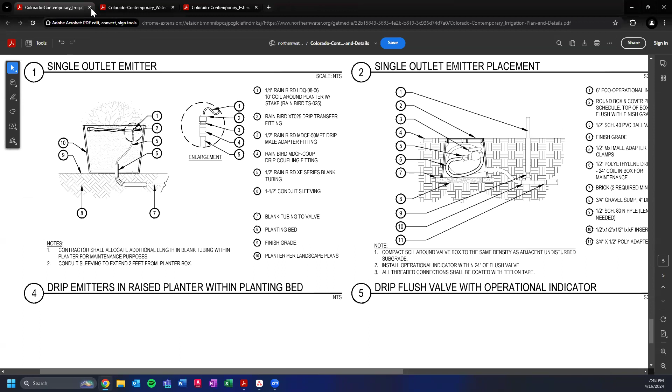Moving on, we are going to talk a little bit about our water use. So with all of this stuff, all of these fancy new plants that claim to be low water, what does that actually look like? Why should you consider going with some of these plants?

So what we did, we had Norris Design run an exercise with some of the local affected areas out of the Marshall Fire, and took some of their water cost analysis - what it costs per 7,000 gallons or whatever their intervals are. We wanted to compare what a theoretical yard would look like, water use wise, compared to some of the new sustainable landscape templates. We were able to identify that in a gallons per square foot per season value. The cool thing about that number is you can look at your yard and be like, okay, I'm using 20 gallons per square foot per year - that's my typical landscape value. Obviously this is going to be different between everybody's yard, but this is an average standard value that we determined based off of lot typicals within the area.

When we look at the SLTs, you see we're down to 9.1 gallons per square foot per season. We're able to cut more than 50% of the water use for some of these templates. A lot of these plants, the goal is just to establish them, take the 3 years to establish them, and then let them thrive off of natural precipitation. Obviously, having the irrigation in the ground for the years we experience drought is super important so you don't lose your plant material, because at the end of the day, plants need water regardless.

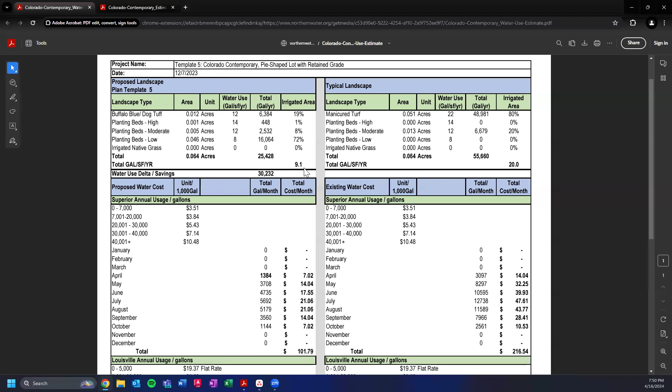What we really try to demonstrate here is, on a square foot basis, what these cost savings could look like. So we took these costs from all of these local municipalities, and we wanted to compare what it would cost per season. For Louisville, with a standard bluegrass and planting bed irrigated area, you're looking about $308 a season just on irrigation costs. With the sustainable landscape templates, we're looking at $146.75 for the season.

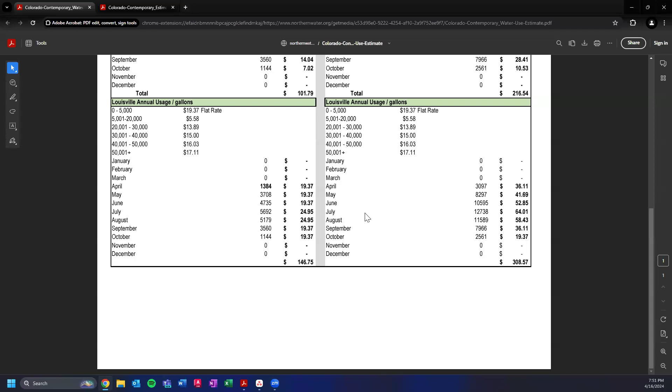Being able to demonstrate the cost value for this has been very valuable in helping people look at these templates as a viable option. Sure, it's only $150, right? But that hurts when you turn sprinklers on at the beginning of the year. It hurts everybody. It's a lot of money.

This is a really good exercise. Again, all this stuff is on the website. We can talk about all of it. If you guys have questions, we're happy to talk about it.

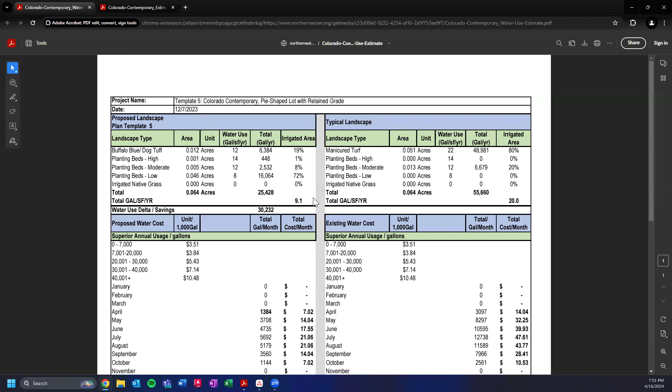The last thing I'm going to talk about here is we do have an opinion of probable material cost, and I would like to emphasize the wording on that. This is the opinion of what we would anticipate materials would cost in December of 2023, that's when we finished this exercise. None of this includes labor. This is strictly material cost at the time that this was performed.

This is geared towards the DIYers, the people who want to do it all themselves. Maybe they're just doing part of their yard, maybe the whole thing, and they want to do the landscaping themselves. This is the resource you can use to determine what it's going to cost. And this was only 4 or 5 months ago, so this stuff is definitely not irrelevant. It's still very valid. Obviously, prices are going to change depending on where you go, but these are kind of cost averages we were seeing across the industry in Northern Colorado.

So we have all these broken down by the description that they're in. We have our planting material here, we'll talk about different trees and shrubs based on their size. Lindsay touched on this earlier: if you want to save costs, buy smaller plants. Small plants are better because they're cheaper, they establish quicker. If you just have a little bit of patience and a little less water, you're going to be very successful with small plants. So I highly recommend looking at smaller pot sizes if you want to save some money. That's probably going to be your best opportunity.

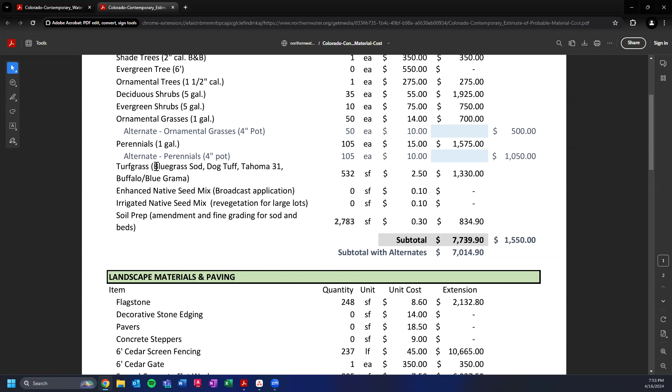It's a nice warm season grass. And then obviously, if you just want to put some bluegrass in, it's okay - just make sure it's a functional space to do so. Buffalo Blue Grama, that is a native blend that we have included on some of the larger sites, and after a couple years of establishment, it is such a great option for large spaces that you don't necessarily want to irrigate all the time.

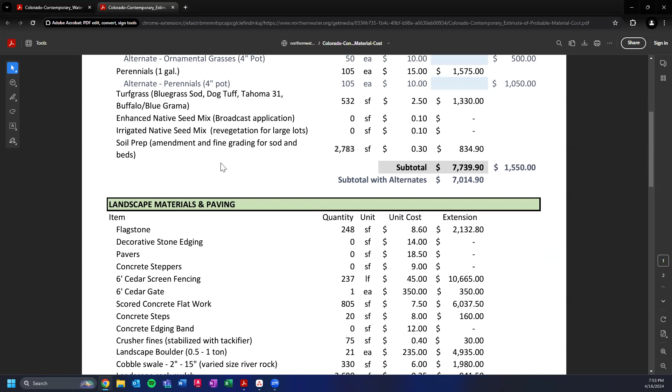Here we have materials and paving, so this is the hardscape stuff. Maybe you looked at the plans and you're like, oh, I really like that patio. I really just want to do the patio, I don't care about any of the plants, any of that stuff, I just want to do the patio.

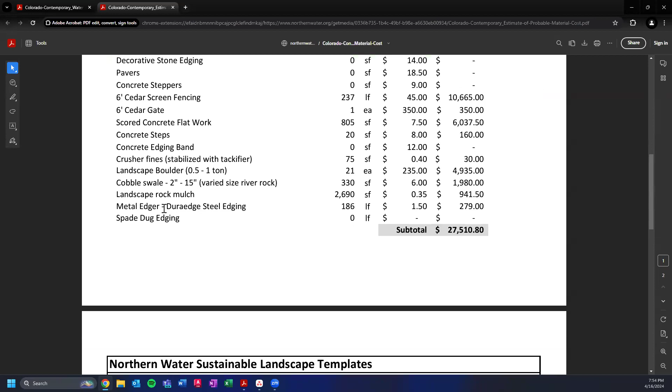This is where you're going to get some cost per square foot on what some of those materials might cost. And then the details to install that stuff, a lot of times you will find in the landscape plan as well, and you'll see some other stuff like rock mulch, metal edgers, edging, and other kinds of things.

And then here we have some landscape features, so this is just like the pergola and a rain barrel, what it might cost for a retaining wall to buy all the materials for that kind of stuff.

And then we'll get into irrigation as well. This is typically on a zone by zone basis. So if you're able to identify that your house needs 10 zones, you can go in here, okay, I need my 10 turf overhead irrigation zones, and I can find out that that's going to be $1,000 a pop, and going to be about $10,000, which is fairly industry standard for a contractor too.

So this is just kind of a really good place to start when you're in your budgeting phase. And then the last thing that's really nice about these is we wanted to put in a square footage per price. So all of these products, the whole point is that you can look at it and fit it into your space, and that's the goal with this as well. So you can be like, oh, well, maybe I've got a 40,000 square foot lot, you can take that, multiply it by $13.09, say you're doing the same thing, and it'll get you in the neighborhood of at least where to start with your material.

And then here, just a couple of notes here, just different cost thoughts here as well. And yeah, that's kind of it for my part here. Again, if you guys have any questions, please put them in the chat, I'm happy to get to them in a second. But I think we've got one more section. Lindsay, correct me if I'm wrong.

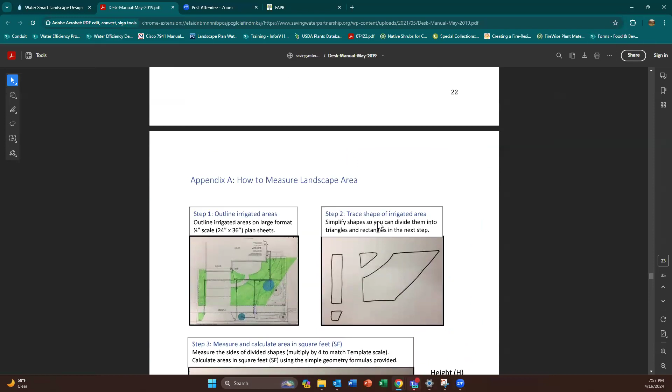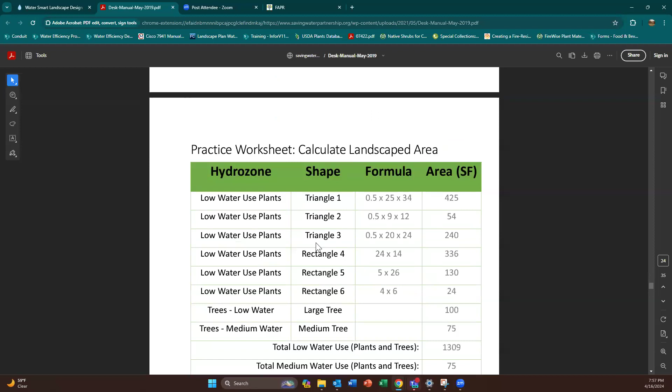And again, if you contact me, I can give you some tips on that too. I think their method is a little bit different than how I would do it. But if you get some grid paper and an architectural ruler, then you are definitely able to sort of measure your own site and make the adjustments needed so that you can kind of make one of these plans tailored to your yard.

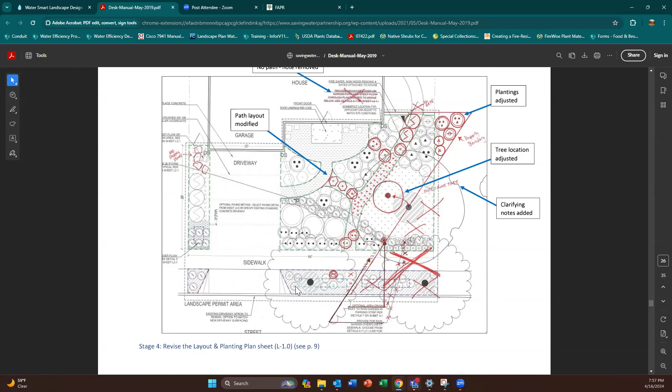And so then if we scroll down again, you can see they didn't want that path, they took that path out, added some plantings. They added some plantings at the corner of the yard. Their yard is shaped differently, so they had to move the tree. So there's a number of modifications that were made to this plan to suit this site. So I wanted to let you know that that is an option for you as well. I'm happy to give you some tips on how you can do that with your own yard. And then also, so we'll go back here.

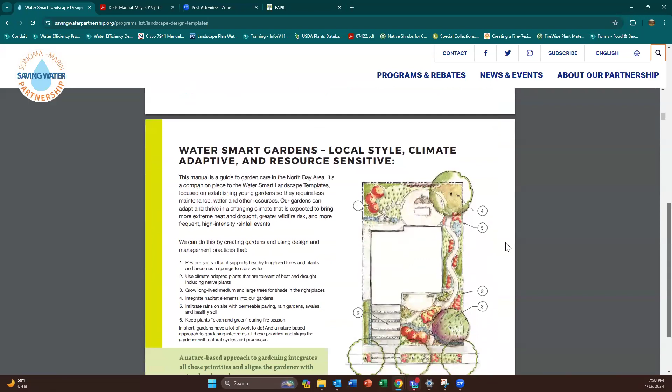We have a maintenance manual that's nearly done, but it's not completely done yet, so I'm not able to share it with you quite yet. But it is largely based off of the Sonoma Marin Maintenance Manual. Theirs is very beautiful and has a lot of great information. Of course, it's not the same region, so it won't be word for word applicable to our region, but a lot of the general points and tips on planting, pruning, all kinds of stuff is going to be similar to our region. So our updated version will be out very soon, and we'll add that to the list of resources for you guys on the website. So that's all I have.